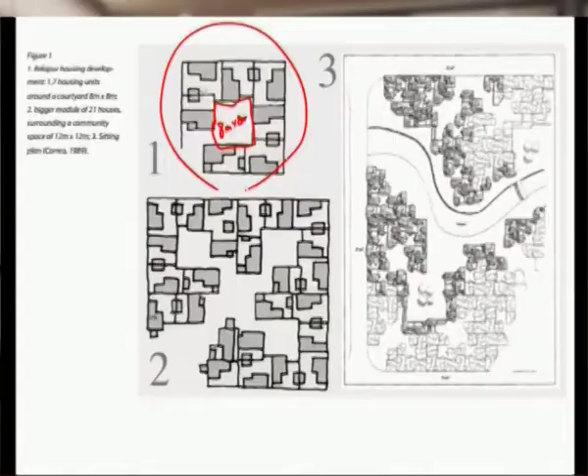A simple form explains what Belapur housing is about. You could see a cluster of 7 different houses encircling a courtyard of 8 meters by 8 meters, with 7 units forming a cluster. The main concept used in forming community in Belapur is clustering, and this cluster is repeated thrice to form a bigger cluster of 12 meters by 12 meters.

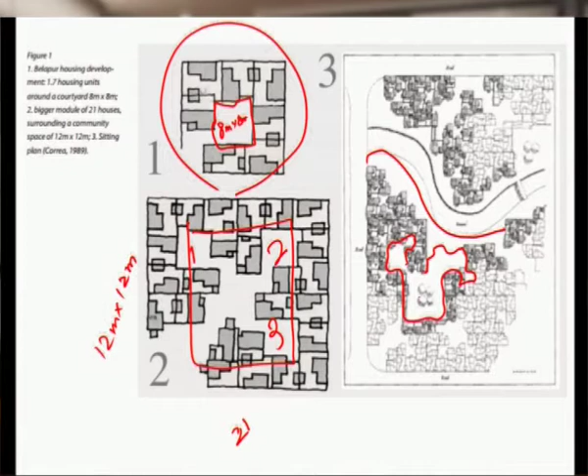This whole ensemble of clusters, with 21 units, is multiplied across a site that has a river edge. Most housing forms have been aligned so that this entire community spreads into different scales and hierarchies of open spaces, leading to the water on either side of the river. This relationship with the natural environment of the housing is established, and the role of community plays a very important role here.

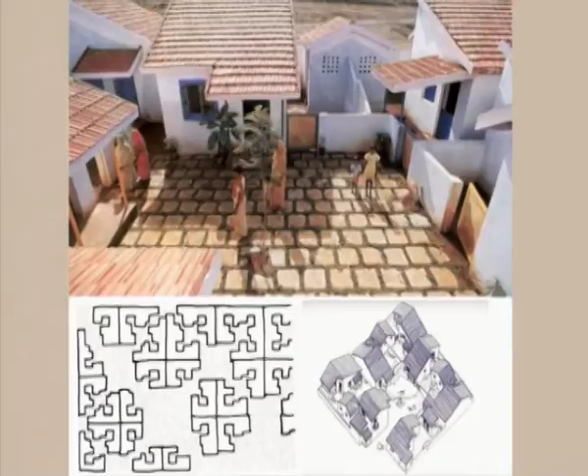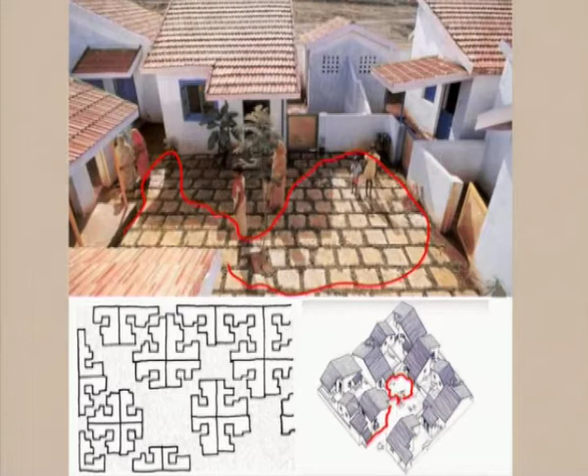Let us see how this has been achieved. This image gives a clear demarcation of how the community space revolves around the entire unit, and in a 3-dimensional axonometric you could see how this community space with a tree is used. This central space acts as a thrust for all 7 houses to come together and interact. You could see kids and different levels of sociability achieved in these spaces, like a jigsaw puzzle intertwined in different organizations, following a different language or grammar of architecture.

This is an extreme example of a high density housing demonstration. You could not believe how 500 people per hectare could be achieved in a low rise. Yes, this is a good example of low rise high density housing, where this density is achieved without sacrificing community facilities like schools and other spaces.

The basic form develops through stages. As the first statement says, build it like a nest and give it to the people to change the rest. An initial multi-purpose room is given, with 2 entrances, 2 side access, and a proper window for ventilation, where the plot is accessed through the main entrance and remaining space is left free for future expansion. Basic amenities like a water closet and bath are provided in stage 1, leading to a plot size of 7 meters by 7 meters.

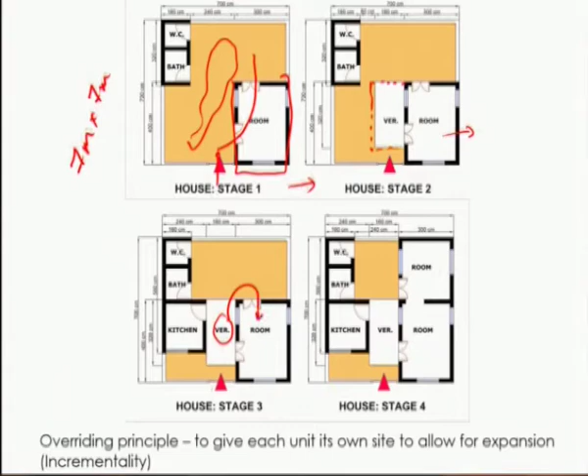Now the house expands according to the needs, with provision of a veranda encircling an entrance for the house, where this becomes the private space. Slowly the house develops organically, where the veranda becomes a more sociable space making entrance to the room, accessed inside or through the veranda, with a kitchen where all services and plumbing lines are connected in one central space, and the remaining space left for the private courtyard.

So now you could see how organically every part of the house is being assembled to form a private, a semi-private space, and a public realm. Eventually the house determines itself to have a private room, a multi-purpose room, a veranda, kitchen, water closet and bath, still not sacrificing the community or the private courtyard.

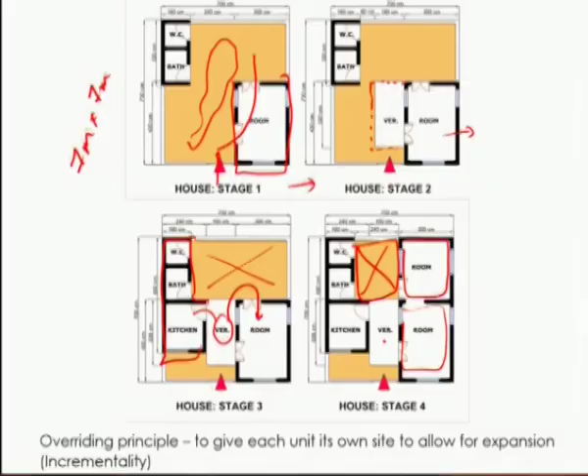So every user has the opportunity to develop this in the way they want, so that the house grows incrementally according to their needs and desires.

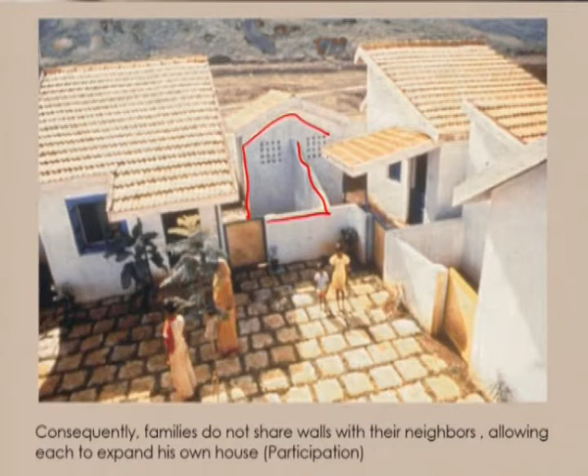You could also see there is a common sharing wall for the toilet facilities, which means every house is cleverly planned so that houses are organized without sharing walls, unlike flats and apartments, and only the service lines and utilities like kitchen or bathroom walls have been clustered.

One more important factor followed here is income generation, which is an eventual part of any low income project, involving the community to build houses for themselves. When you teach them how to build, this generates income for the people.

Now moving on to the next concept, pluralism. This complex is not just built for low income; it includes several different income groups, so that a sense of pluralism is followed. This accommodates the entire social spectrum, including LIG, MIG, and different affordability rate users.

Slowly the house plan evolves into 5 different types of places, ranging from 45 to 70 square meters, including the lowest budget of 20,000 and accommodating an upper income of 1,80,000. So according to user needs and affordability, the size of the unit changes.

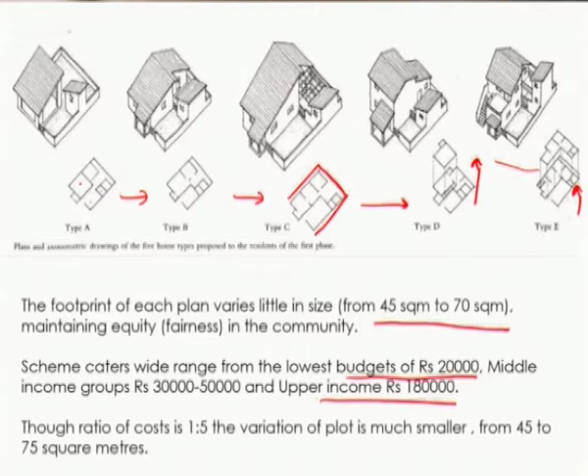As you could see, this starts with a single room and a common kitchen space, where this form eventually grows larger in size and square meter area, and organically develops vertically. So the house formed from a grounded structure slowly evolves to form a G+1 structure, still not sacrificing the community space.

The scale of community spaces varies in different forms, sometimes bigger and sometimes smaller. The living area and entire unit of cluster B is proportioned as 8x by 6x, where this 8 times x is a single module proportioned 8 times to form the plot area, and x is the dimension left free, with 2x and 4x.

Out of this proportion 6x, the width of the length is followed as a housing profile. So width of the plot and length of the housing profile almost match, so the entire L by B proportion is to scale. The clustering includes a common sharing wall, exactly symmetrical to each other, with living facilities combined on one wall where toilet facilities are completely spread, a common wall abutting the neighbor, two different toilets having open spectrums, and a sharing wall with different units clustered on either side.

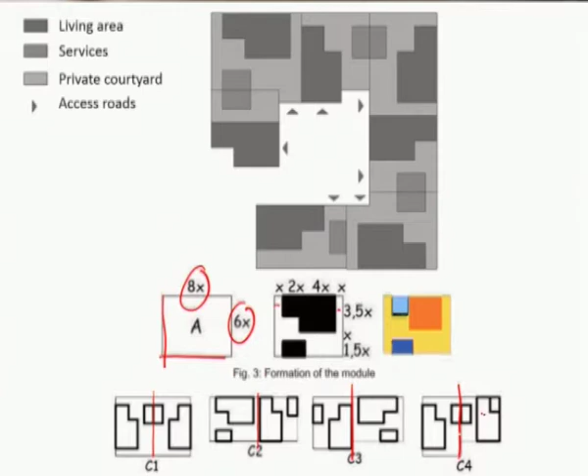Now moving on to the elevation. Here the elevation is kept very simple, and you look at the largest, the 70 square meter plot. You start with a staircase leading into a private space, which eventually leads to a kitchen and a backyard, with the kitchen and water closet and bath connected through a separate scale of a courtyard space.

There is another stair that leads to the upper part, where you still have another semi-open space or an open terrace leading into another private space and a small side room with a bath and closet. The bath and closet form a common core, making it easy for the utilitarian networks, sewage, and plumbing lines to fall under a single category, while the kitchen, side room, room, and private spaces are organized on the other side of the open space.

So even though this is a 70 square meter or 700 square foot typology, you have a series of open yards which define the spatial organization for the community to grow eventually.

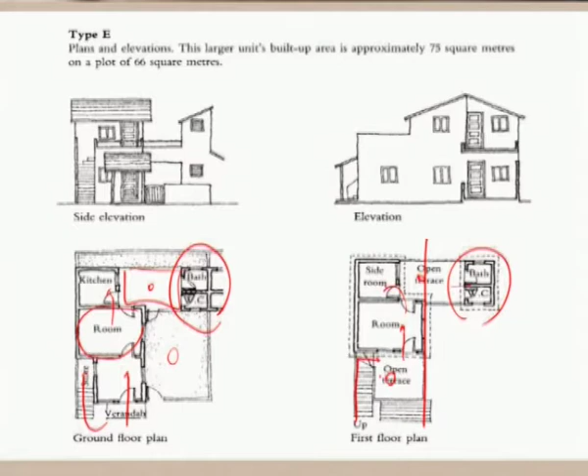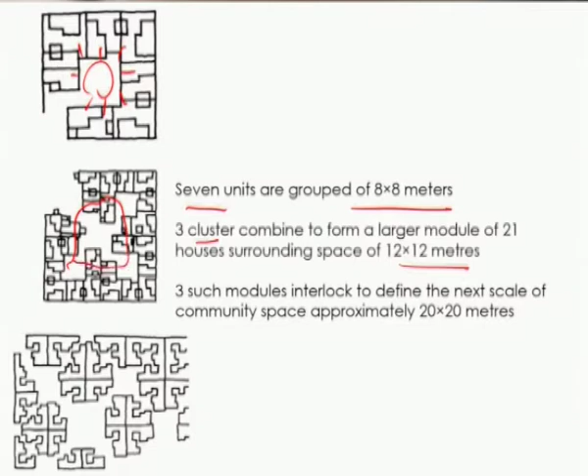Now the clustering of 7 units, as we said, are combined that eventually lead to a group of 8 meter by 8 meter courtyard, and these 3 clusters combine to form approximately a 12 meter by 12 meter courtyard, and the third hierarchy forms together to form a 20 meter by 20 meter courtyard. This is otherwise called a hierarchy of different open spaces led in the master plan designed by Correa.

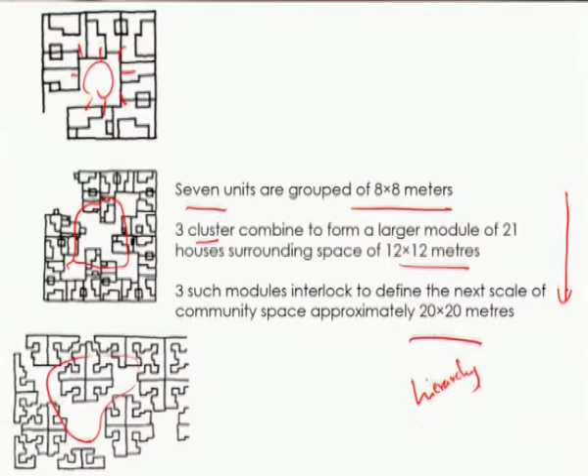Now, there is something called a shape grammar, or the language of architecture, that has been followed by the architect himself. Assume C to be the courtyard and 7 units assumed around it. Taking the positive impacts of how the spatial organization could be has led to different series of permutations. Imagine the courtyard at the center, where the northeastern part of it is going to be 1 unit, and what would be the possibility of orientation of the unit in the first part.

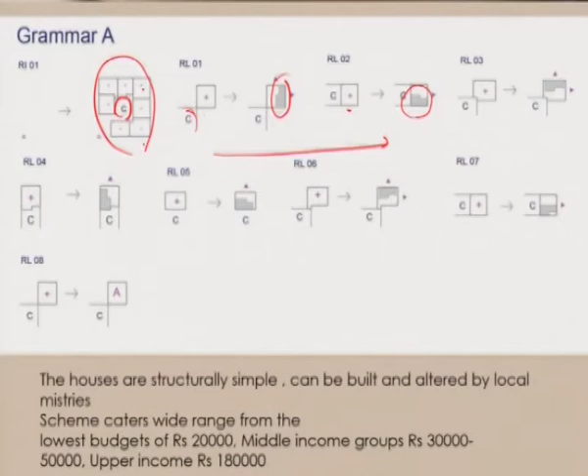Assuming the courtyard towards the left of the unit, what would be the possibility of orientation of it? So the same unit is repeated in a different way to form this cluster, and this is called the shape grammar. These houses are structurally simple and can be built by any local mason, which means there is not much technology involved, and local people without any knowledge could be involved. The scheme caters to a wide range of lowest budgets, from 20,000 to 1,80,000, as already mentioned.

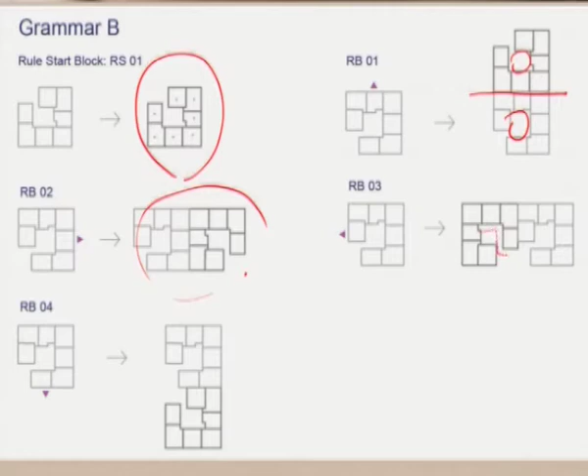Now, in shape grammar B, this explains how individual clusters of 7 units and 7 units are combined. So assuming in shape grammar A we got 7 units, now this is symmetrically organized to form two groups of 7 units which forms 2 courtyards, or it can be mirrored this way, or mirrored vice versa to form a connected open space. This is separated open space, and another way to connect it would be in a 3 format which has a series of open spaces. So in shape grammar B, he tries to explain how the different clusters are organized around each other, and the spatial format leading to different series of courtyards.

Now, moving to the next example, which is almost similar but in a different context, where this explains the concept of incrementality in a different way. So, Yerwada housing, designed by Elemental in Pune. Here you could note the site location is right close to the city, not very far away, but 6 kilometers from the city center, and the typology followed here is low rise incremental. It is a participatory approach unlike the Belapur housing.

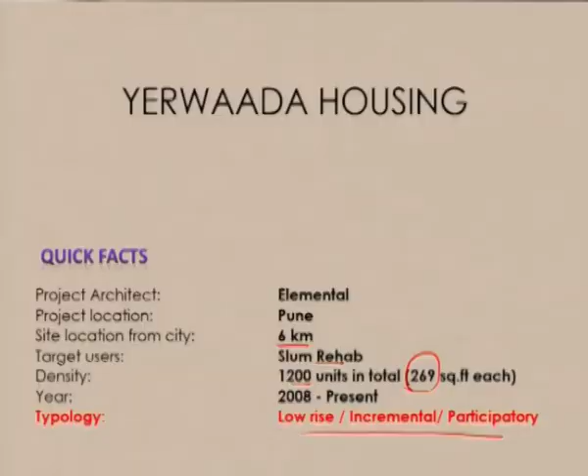Here the density achieved is 1200 units in total, and approximately, according to the slum clearance board, 269 square foot is followed as a common thumb rule for every unit. It is a slum rehabilitation program developed in Pune. This incremental housing strategy is intended to grow organically, which means that without removing the existing community or without uprooting the community, the slum grows eventually one on the other.

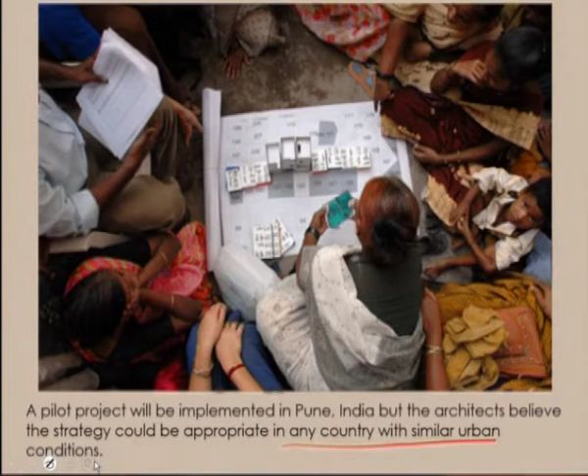And this model can exist with any similar urban conditions, which means this cannot be replicated elsewhere, but this can be followed in a pattern where the urban conditions or the context remains the same in any part of the country. As the architect of this, Prasanna Desai, said, what we did was to involve the beneficiaries in the process. So this involving the beneficiaries leads to participatory action, which is very important, and this will be explained through these lectures.

Two different housing typologies were designed, and possibilities of grouping to share walls or have individual homes, or mixing the options to fit the individual demands, are adapted to the most arrangements. So now when something is participatory, individual demands come into existence, and when these two come together, this caters to the needs of the individual user.

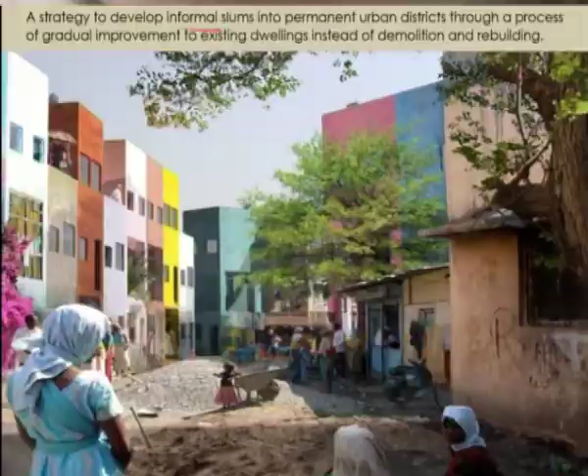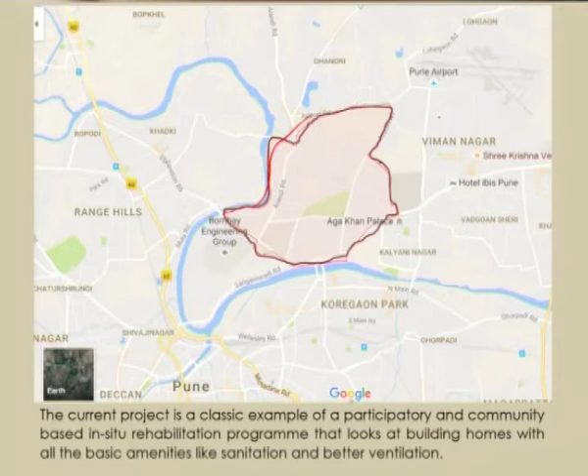This strategy is to create these informal slums into permanent urban districts through the process of gradual upgradation. So any slum upgradation or rehabilitation project cannot happen just in one stop or one go; it has to take time, and gradually it improves over the course of time. Now, looking at the center, it is surrounded by different areas and is very close to the airport, which means there is possibility of the city growing towards this, and eventually this could be encircled in a way that every access to social and other facilities could be through the site.

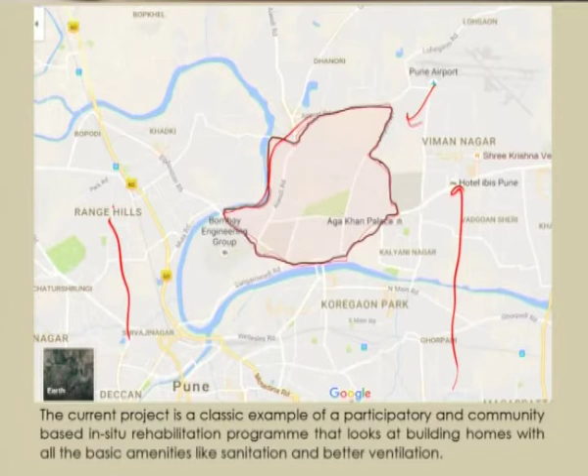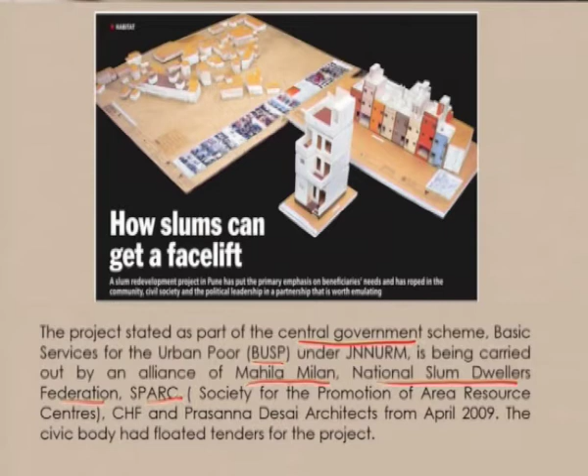Now, talking about the project and how it has evolved: it started with the central government scheme, so it is more or less like a top down model. It started from the central government through the BSUP, the Basic Services for Urban Poor, under JNNURM, the Jawaharlal Nehru Urban Renewal Mission, and is being carried out with Mahila Milan, a Women Empowerment Society, and NSDF, National Slum Dwellers Federation, and SPARC. You could imagine what scale of project this would be, involving central government authorities, state government authorities, different agencies, local bodies and national organizations, all involved in developing or upgrading to give a facelift to the slum, with Prasanna Desai as the local architect involved. This started around 2008 and is still organically evolving.

In this kind of project, we couldn't say the timeline started from 2008 and ended here. It is a continuous process, still happening on site.

Addressing the media, Mr. Prasanna Desai said that for this project they conducted workshops and activities allowing families to play with maps and models. This clearly shows every community or person has been involved in the design process, with architects along with local organizations and the community all playing an important role in building these houses and communities.

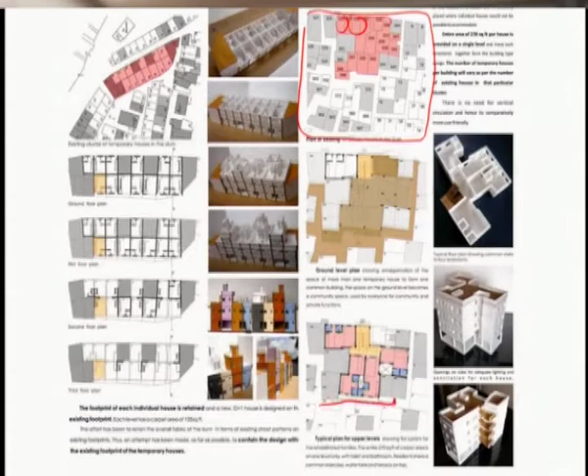Now there are different sets of plans which are unlike Belapur, where 5 different typologies have been replicated in different parts. This is an in situ upgradation, meaning existing plots. This is an already existing plan where specific sets of buildings are taken into consideration and typologies have been derived. So there are basically 2 different typologies, on an incremental basis.

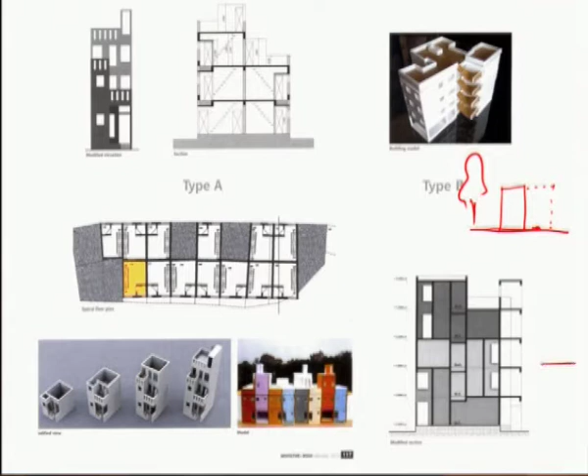Unlike Belapur, where there is horizontal expansion of communities, in Yerwada there is vertical expansion. Incrementality is the same concept being followed, but rather than growing horizontally, this grows 1 or 2 floors above, and the model of the house is replicated. You could see how gradually the house grows according to different user demands and needs, but keeping a central point that this does not exceed the 269 square foot indicated by the government slum clearance scheme.

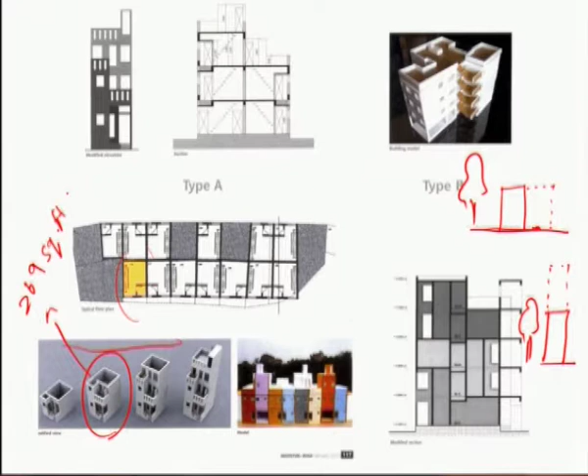Whatsoever the philosophy of housing or design that caters to these low income profile people, there is a standard already set by the government which should be considered. Most of these, according to slum housing, efficiency, economy and energy are 3 major points which have to be considered, where efficiency leads to proper utilization of resources and efficiency of the labor involved.

Economy is generating micro economy or teaching them how to build so they could later upgrade their lifestyles through these different economic processes. And energy: how much less footprint you use, how energy efficiently you build, and how sustainable you are in terms of social, economical, and physical sustainability.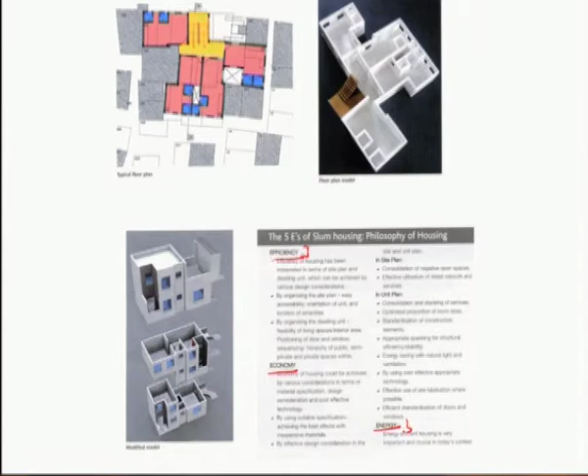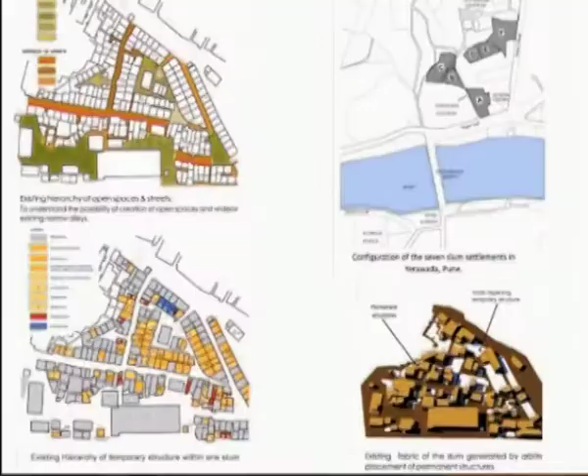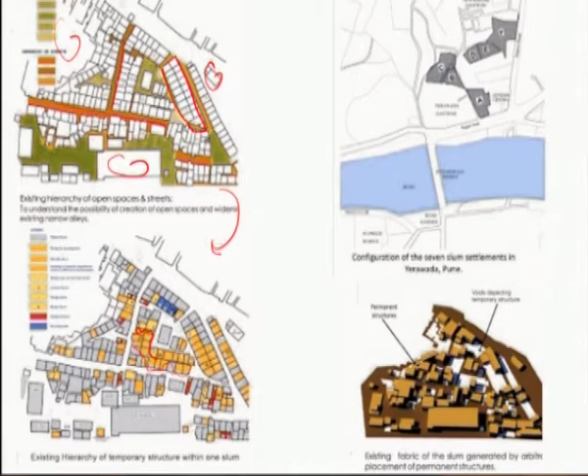These are some of the drawings and maps generated by the Mahila Milan architects and the organization, where the existing hierarchy of open spaces have been routed at different levels, and the road characters - primary, secondary, tertiary - along with plots have been studied and mapped out. This eventually goes to a land use map showing what communities, or these typologies, on how individual units could be modified, and on a phasing manner these have been individually retrofitted by the user himself.

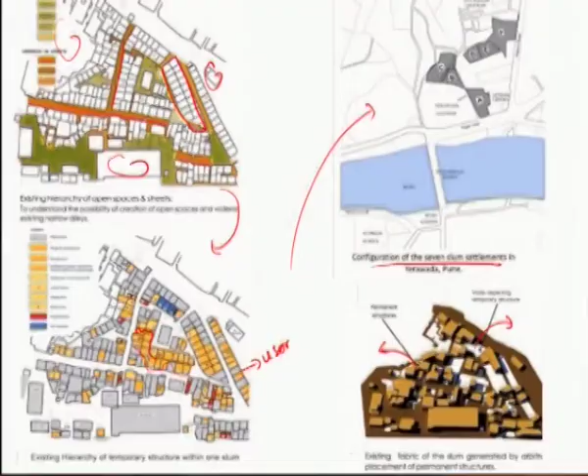The plan indicates 7 different groups of slums in Yerawada. The configuration of a series of slums in Yerawada area has been taken into consideration, and slow gradual developments of temporary and permanent places have been designed. This is an organically growing community, not having a set standard of development other than a standard square feet area, and this involves the community, and has been successful in terms of upgrading user lives.

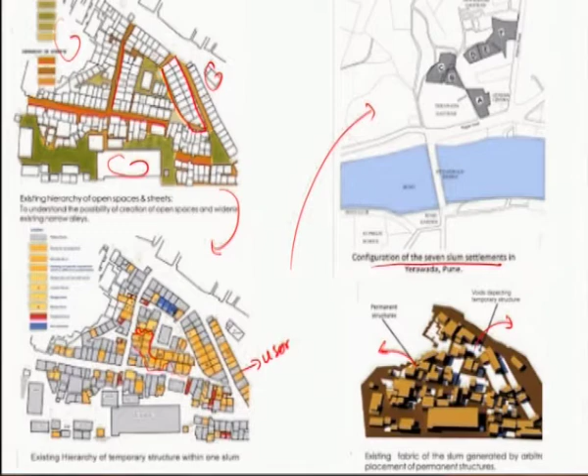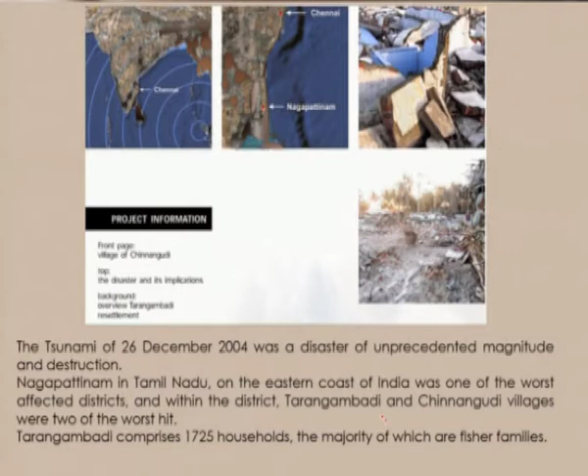Moving on to the next example of tsunami housing in Tamil Nadu, Nagapattinam district. This was sponsored by Swiss Solidarity and Swiss Red Cross, close to Sirkazhi, Nagapattinam and Tarangambadi districts. There were totally 1000 units developed, and again the typology adopted here is low rise cluster typology. As everyone knows, after the December 26, 2004 tsunami, the entire coastal stretch was vastly hit.

This tsunami created a devastated environment in coastal areas. Addressing this, there was a low-rise community proposal, a holistic approach which benefited the disadvantaged people and minorities. Unlike the other example where we talked about low income profile in general, here this project more or less addresses every part of the spectrum of a low income user group, taking special consideration of the minorities and disadvantaged people.

Out of the 1000 houses built, 250 were on the same site as in situ development, and 750 were moved out of the site, with relocation done in the area provided by the government itself. The roadmap started with analysis of damage.

First the group of people identified what kind of damages had happened, and slowly moved on to study what kind of spaces the coastal community people required. After the spaces, habitat mapping was done, the socio-economic survey was taken up, and from this survey, awareness was spread into the villages on how to develop these communities and what the construction process could be.

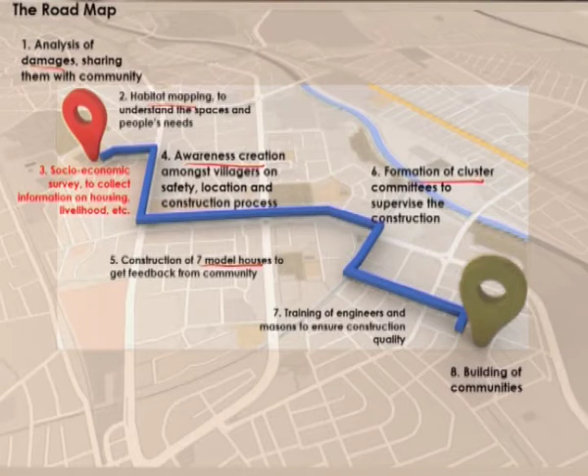Construction of 7 model houses were done, and eventually that developed into formation of cluster committees, because once the construction is done, there needs to be a group of people or a cluster committee that has to be assigned to maintain all these houses. Training of engineers were done, and finally building of communities happened.

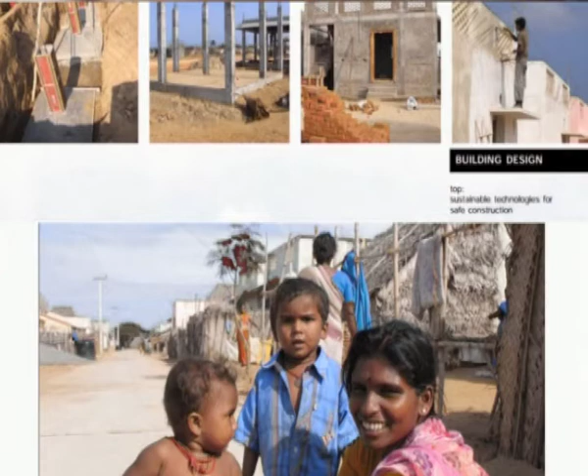These communities and the construction method were very conventional, using RCC construction appropriately with a simple framework. These communities thrive with a low rise typology, and the cluster approach was very simple, so the project was divided into clusters of 25 to 50 houses.

Each cluster was assigned 5 house owners to take care of the community or the cluster along with a cluster supervisor, and these cluster officers were in turn associated with engineers and architects who would train them. These people, who were eventually targeted for the entire community, are taking decisions at micro level, which means larger contractors can be avoided in the housing process.

Always when larger contractors are involved, the profit making becomes the motive, and when profit making is the motive, low income might not survive. So the ultimate decision taken by the government was to take decisions at micro level, which involves the community people and the supervision officers.

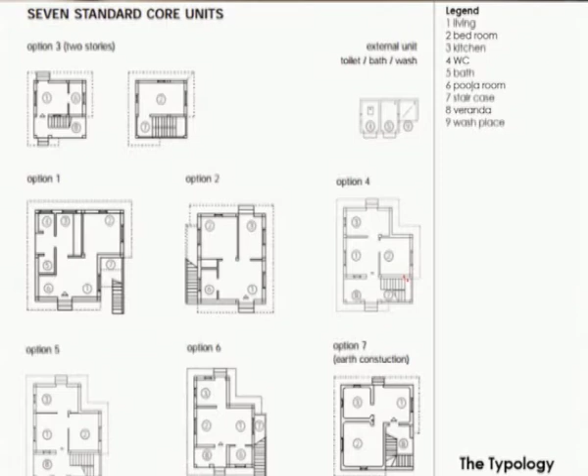There are 7 different typologies, which include a living room, bedroom, kitchen, water closet, bath, puja room, staircase, veranda and wash place, added according to different users. So this also addresses a spectrum of social strata.

This does not cater only to a family size of 2 or 3, but caters to a wider variety. As the typologies move on, you could see there is growth in the spatial typology, increasing the square meters and also growing in terms of floors.

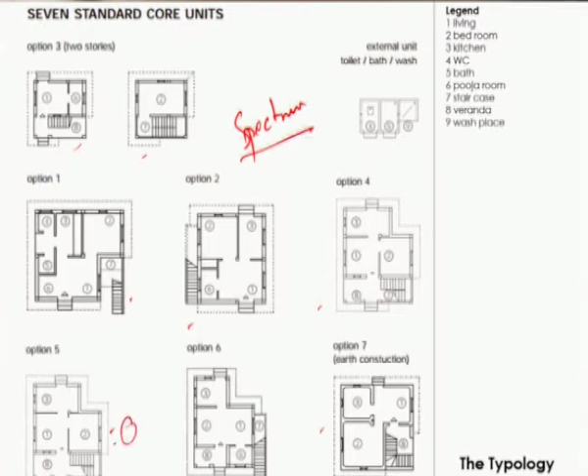The cost of the house was around 3 lakhs, which was a little bit affordable, and the financing of this made it much easier for people to access it.

The entire key decisions taken were to avoid contractors and involve house owners, clusters, volunteers and engineers. At this smaller scale, they were able to control these non-profit making issues, so that the housing typology could be a bit successful, and the quality of construction was achieved and tested.

The essence was extended when people improved their houses to prove their upgradation in lives. Ultimately, the involvement of the communities made the entire project a holistic and successful one.

Though space for stakeholders was provided, it also resolved several conflicts and demands involving the community, making it a process of success. This community wanted immediate resolution of these conflicts to be done at those stages itself, and this eventually did not compromise on the quality of construction.

Moving on to the last example, Kanchenjunga Apartments, which is much diverse from all the 3 we were looking at before. Kanchenjunga addresses form, aesthetics, vertical zoning of different spaces, and different climatic aspects on how architecture could be addressed with respect to climate.

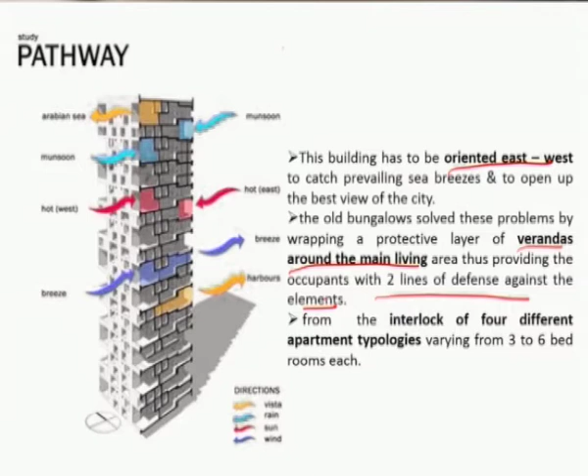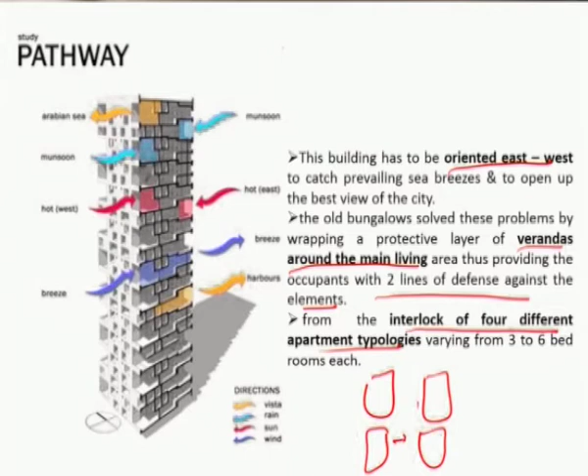Basically 4 different units were taken, and clustering of these 4 in different dimensions, scales and vertical zoning gave the resultant of this entire high rise marvel.

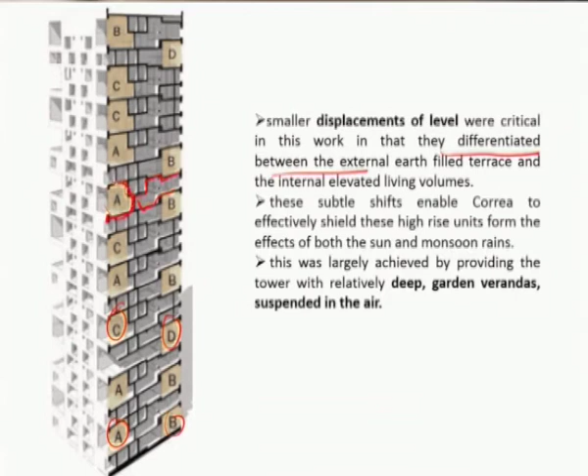There are 4 typologies - A, B, C and D - which are stacked vertically, and these smaller displacements in levels were used to differentiate between the external earth-filled terrace and the internal living room.

These levels were critical because this addressed what was an outdoor space and what was an indoor space, and these scale differences were achieved by interlocking different units in section, addressed using deep garden verandas suspended in the air.

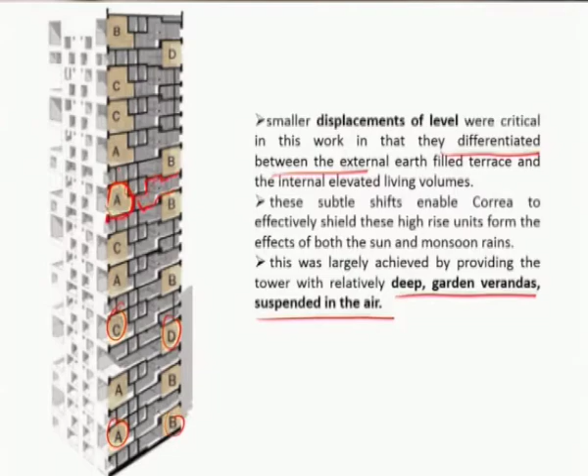As you can see, all these yellow areas are verandas, relating to the catching of monsoon winds. There were 4 different typologies, and this sits right in the city center, in the heart of the city, where the form corresponds to other different neighbors which are again high rises now.

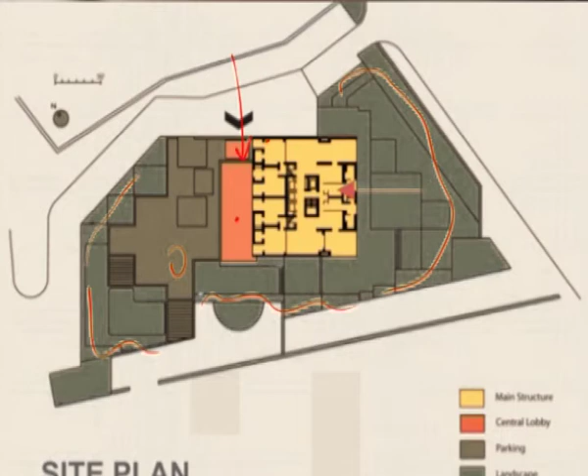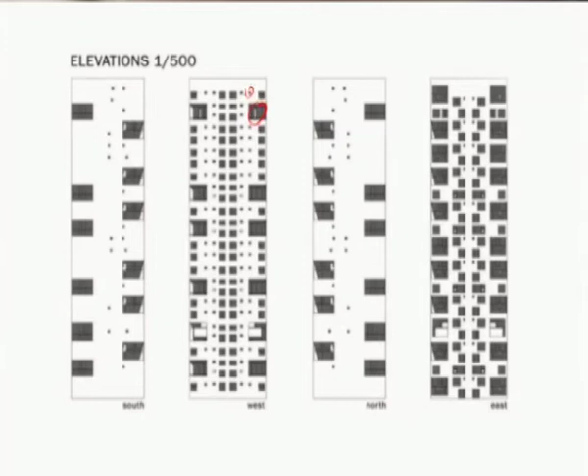As the elevation shows, it is parametrically designed, exhibiting a shape grammar, and different punctures at different levels give an aesthetically appealing visual quality to the entire facade. The facade is simply planned with punctures here and there that create these veranda spaces at smaller and larger scales, and this displacement of verandas keeps it non-monotonous, making the form on different elevations much more ambiguous.

The vertical zoning has parking related to the basement with the central lobby connecting to different floors across 27 levels, and these internal sections and internal slabs create differences in the living environment internally. There's surface parking for 20 cars and basement parking for 30 cars, plus a clubhouse, pool, entrance, and 4 different typical apartments. Elevators stop at alternate floors.

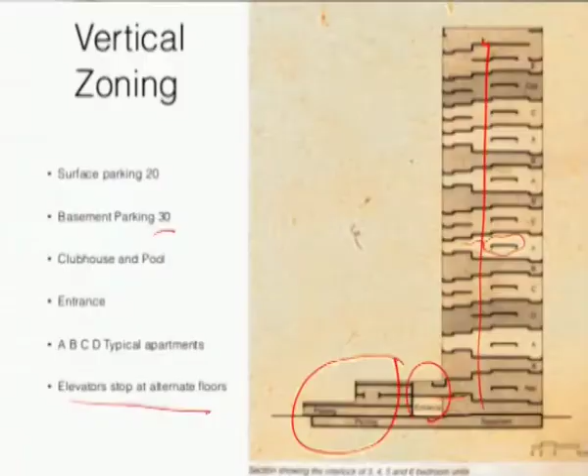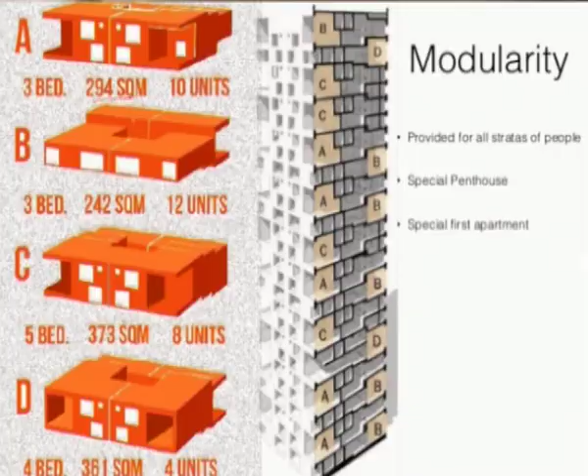The modularity is explored in 4 different kinds of models, starting from a 3 to a 5 bed apartment ranging from 294 to 373 meter square, with a special penthouse provided on top. Exploring one model, this explains how internal organization leads to deeper verandas.

In the 3-dimensional form, this deeper veranda is visualized as double floor high, exhibited in the corner as you can see. There are 2 scales of veranda, one on the right and one on the left, to maximize the wind according to the orientation, and from the lift core here it enters through the main.

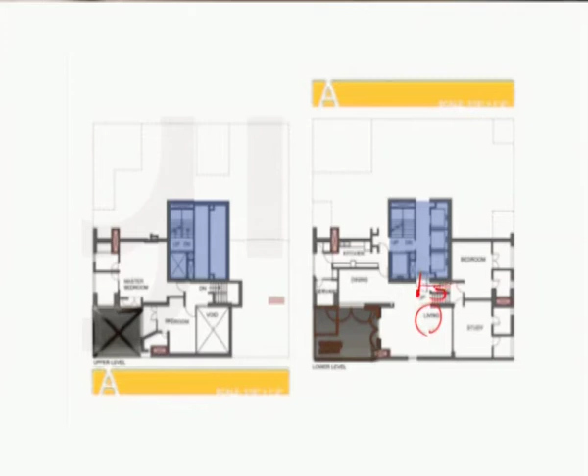This exhibits a terrace garden on the left accessed through the living room, which moves to a dining area, and there's a separate entrance from the corridor given to the kitchen and utility area. This clever spatial organization separates the service entry and utilities on one side, while private spaces are clustered around the organization of verandas and balconies on the other side.

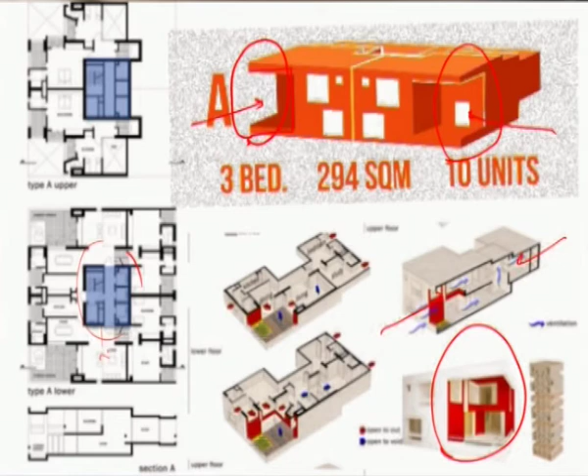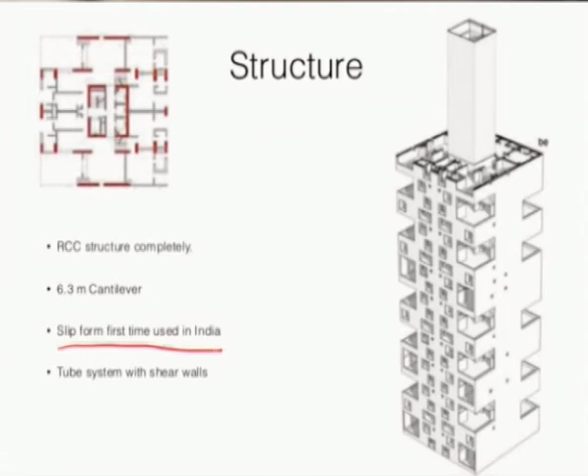Moving on, this explains the breeze movement within the internal section, as already seen in the section of the entire building. The structure follows slip form technology, first used in India, where concrete is poured and the shutter moves or slips once the concrete sets, adjusted with the quality of concrete to set early.

These sketches explain the visual quality of the interior spaces at two different levels, showing how single and double height spaces work together. Balconies and verandas work at different scales, creating different punctures and levels, and the colors added also give a visually pleasing environment.

Finally, Kanchenjunga sits in the center of the city, making it a landmark and a quality space to live. So just to summarize on what we were looking at.

We were looking at what user oriented design is, different types of housing modules, incremental strategy, community participation, spatial planning, and climate responsive housing case studies. This spectrum of housing case studies explains the different qualities or processes of housing that could be encompassed.

Just a few questions to explore would include how planning and layout works on different case studies, the concept of shape grammar and how it was achieved, and different strategies of planning low income houses could also be explored. Let us see some of the housing processes which are linked in the next chapter and the next series of lectures. Thank you.